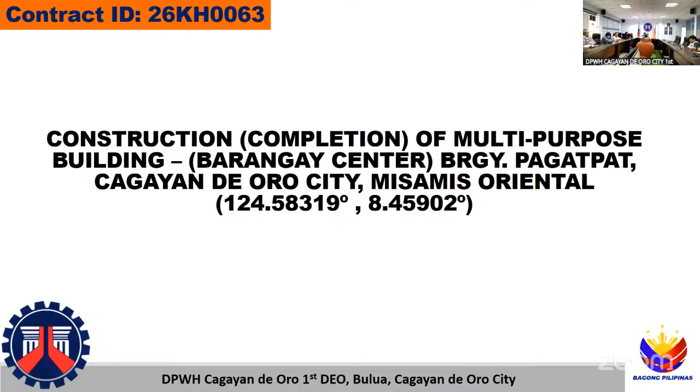Hello, good afternoon, everyone. I'll be representing the project named Construction Completion of Multipurpose Building, Barangay Center, Barangay Pagatpat, Cagayan de Oro City, Misamis Oriental, with coordinates of 124.58319 and 8.45902, with a contract ID of 26KH0063.

The appropriation for this project is 3 million, with an approved budget contract of 2,969,905.11 centavos, with 100 calendar days, under major categories BICWOPLC, buildings construction without piles, low-rise concrete frame, and similarly BICWOPHC, buildings construction without piles, high-rise concrete frame. The scope of work is the construction of the extended two bays of the existing covered court with electrical works, and the elevation of the existing basketball court concrete slab with painting lines.

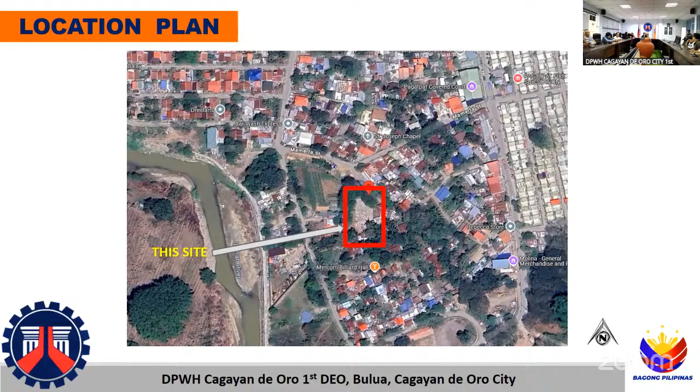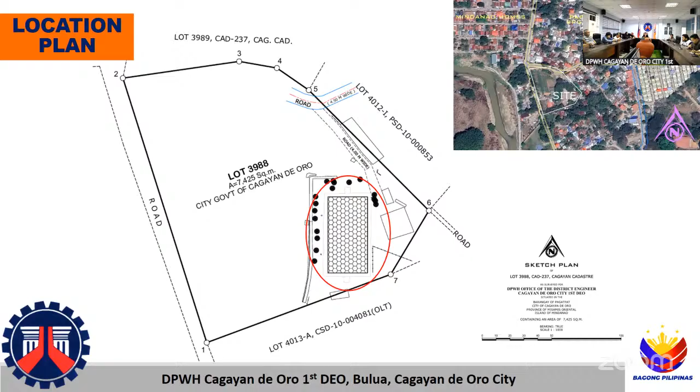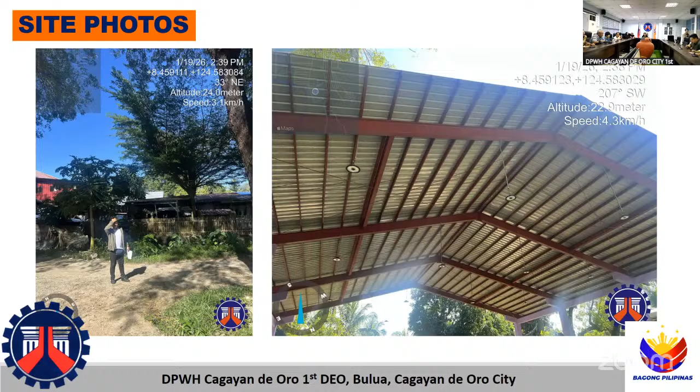This is the location of our project, to be constructed near the St. Joseph Chapel, Mamerta Street. This is the location plan, or site development plan, and these are the site photos of the area. As you can see, we have an existing 3-bay covered court.

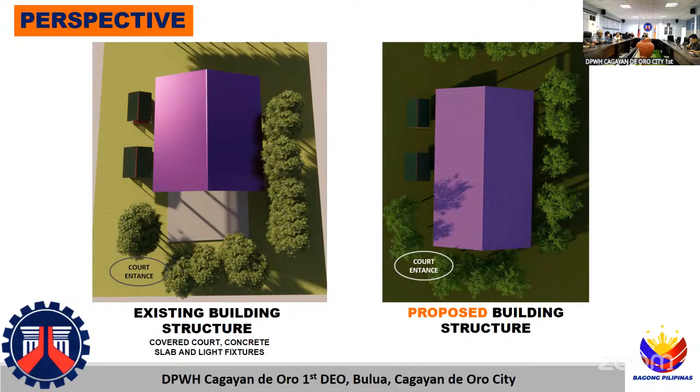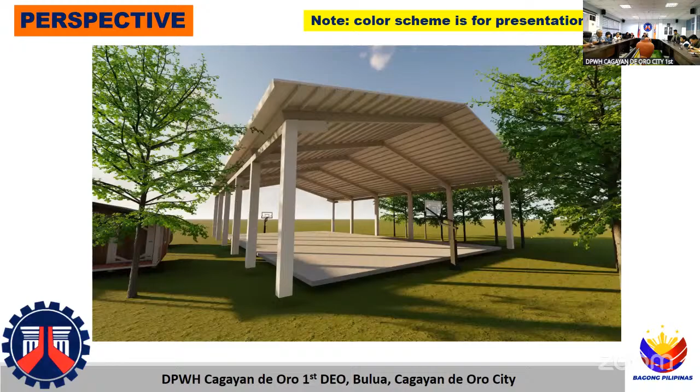For our perspective, the existing building structure, covered court, concrete slab, and lighting fixtures already exist, and for the proposed building structure, it would become a 5-bay covered court rather than just 3, an addition of 2 bays for the covered court. This is the truss perspective.

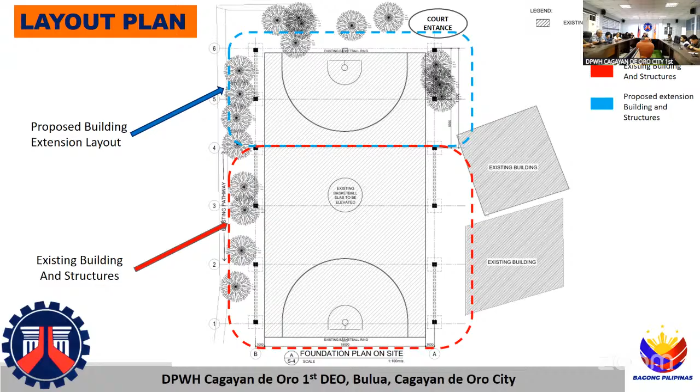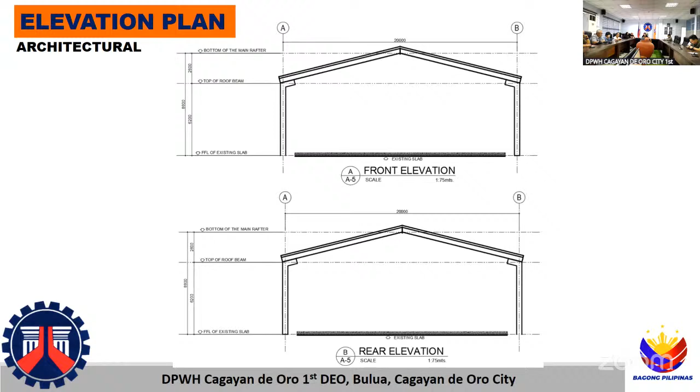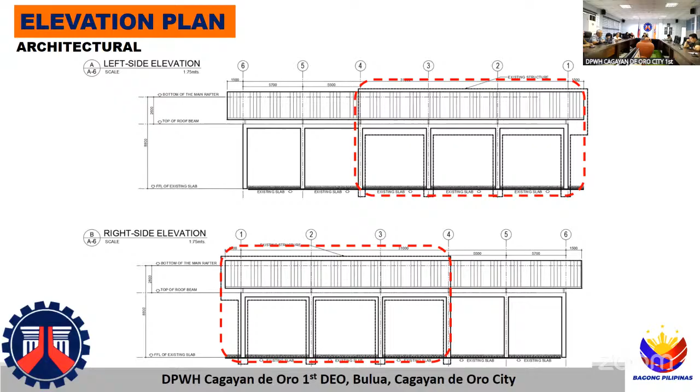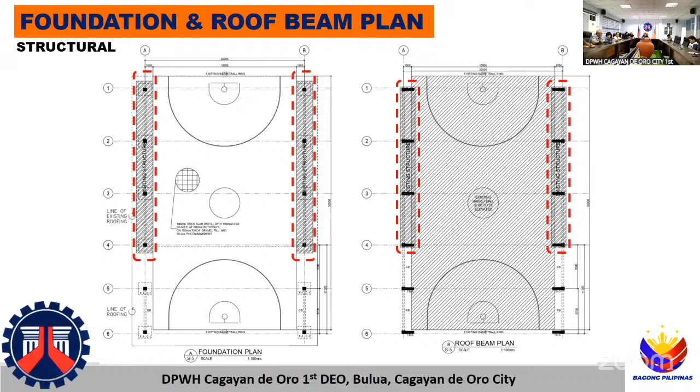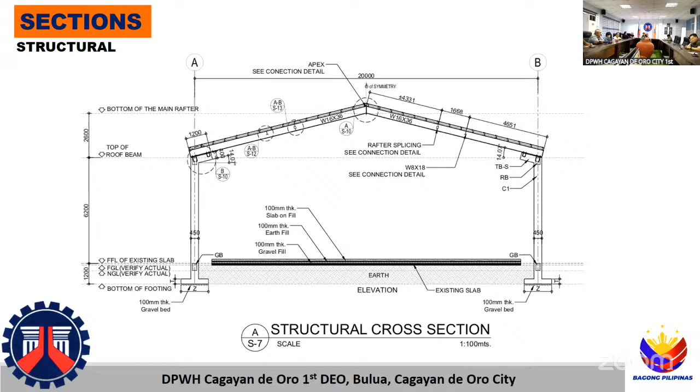For the foundation plan and the roof beam plan, we only have an addition of 4 footings, 4 columns, and 2 grade beams, as well as 4 roof beams to be added for the roof beam plan. We have the roof framing plan, and these are the structural cross sections and longitudinal sections.

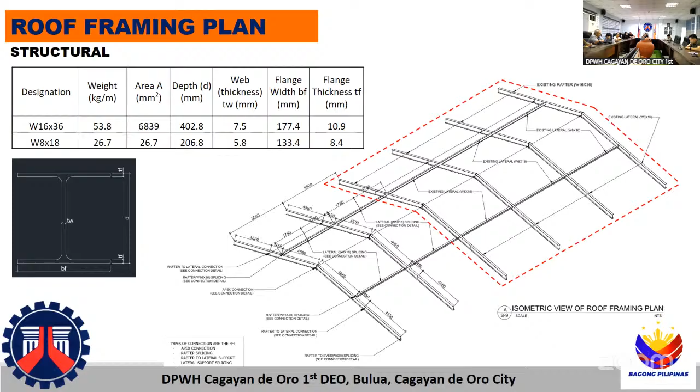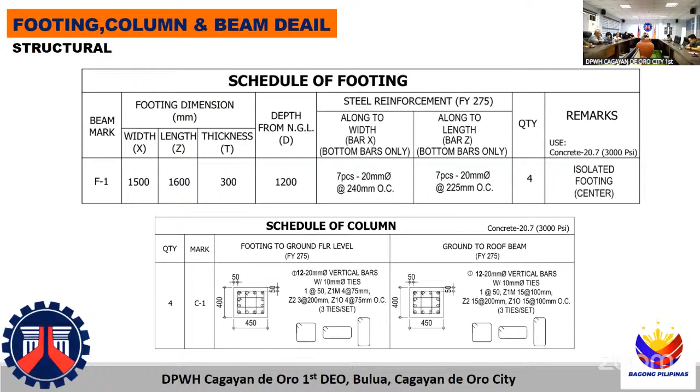For our trusses, we're still going to use the same as the existing trusses, which are wide flange of 16 by 36 and 8 by 18. These are our schedules for our footing and column, and for our beams. These are the details, the connection details.

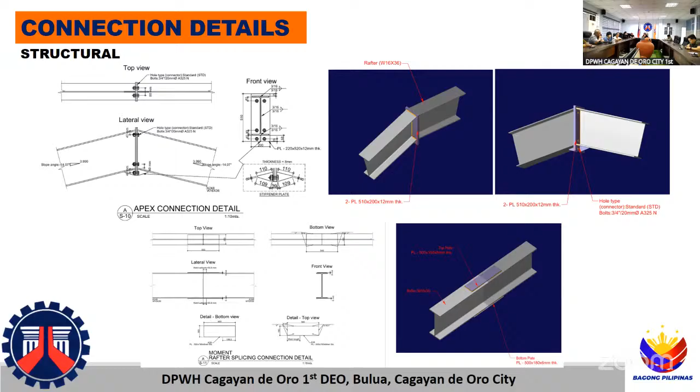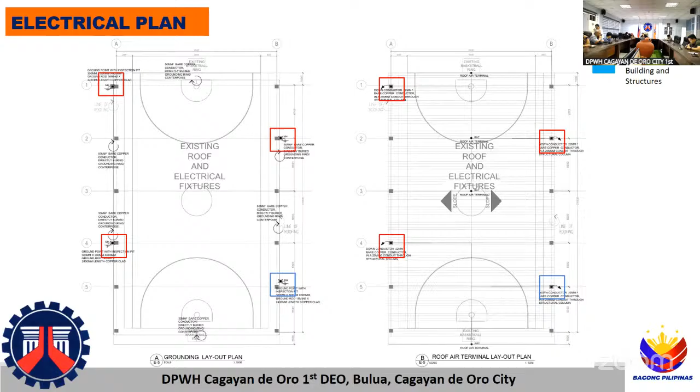As for our electrical plan, we have the lighting layout plan, the power layout plan, and the grounding and roof air terminal layout plan.

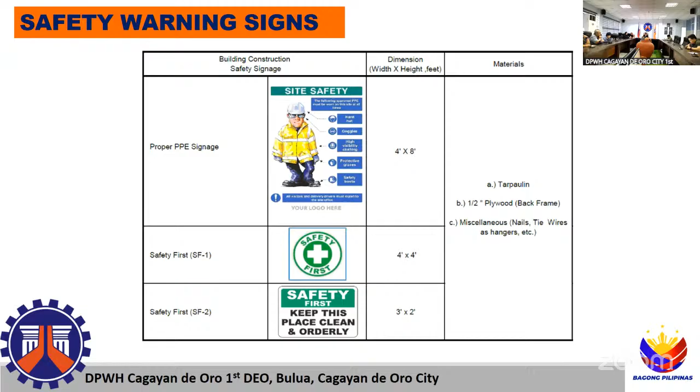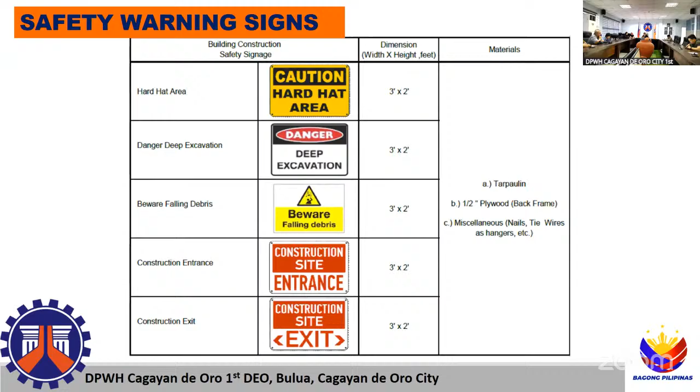And of course, we have our safety warning signs, which are the proper PPE signage, Safety First SF1 and SF2, the hard hat area, danger deep excavation, beware of falling debris, construction entrance, construction exit, safety harness required, welding hot work area, authorized personnel only, fall hazard, and temporary material stocking area.

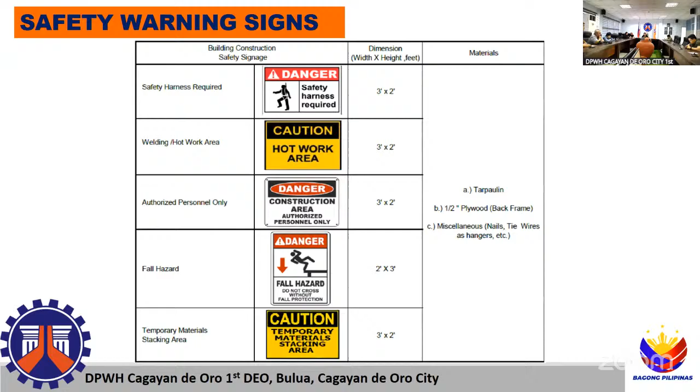For the summary of quantities, Part B, other general requirements: B51 project billboard signboard, 2 each; B71 occupational safety and health, 1 lump sum; B91 mobilization and demobilization, 1 lump sum.

For Part C, earthworks: 803-1A structure excavation common soil, 32.13 cubic meter; 800-4 individual removal of trees, 2 each; 804-1A embankment from roadway structure excavation common soil, 107.19 cubic meter; 804-2A embankment from borrow common soil, 75.06 cubic meter; 804-7 gravel fill, 58.56 cubic meter.

For Part D, reinforced concrete: 900-1C structural concrete, 12.08 cubic meter; 902-1A1 reinforcing steel deformed grade 40, 4,654.05 kilograms; 900-2C structural concrete class B 28 days, 67.60 cubic meter; 903-2 formworks and false works, 122.85 square meter.

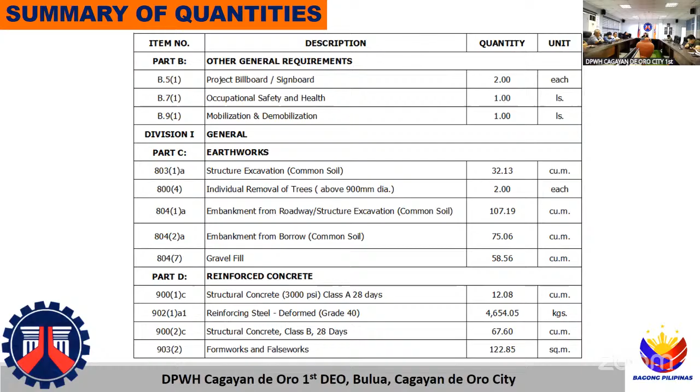For Part E, finishing and other civil works: 1013-2A fabricated metal roofing accessory, 17.08 linear meter; 1014-1B2 pre-painted metal sheets, 296.33 square meter; 1032-1A painting works for masonry concrete, 75.46 square meter; 1032-1C painting works steel, 277.51 square meter.

1047-4B metal structure accessories turnbuckle, 8 each; 1047-5A metal structure accessories bolts and rods, 19.76 kilograms; 1047-5B metal structure accessories sagrods, 42.62 kilograms; 1047-5C metal structure accessories cross bracing, 161.16 kilograms; 1047-5D metal structures accessories steel plates, 820.52 kilograms.

1047-8A structural steel trusses, 3,327.60 kilograms; 1047-8B structural steel purlins, 669.06 kilograms.

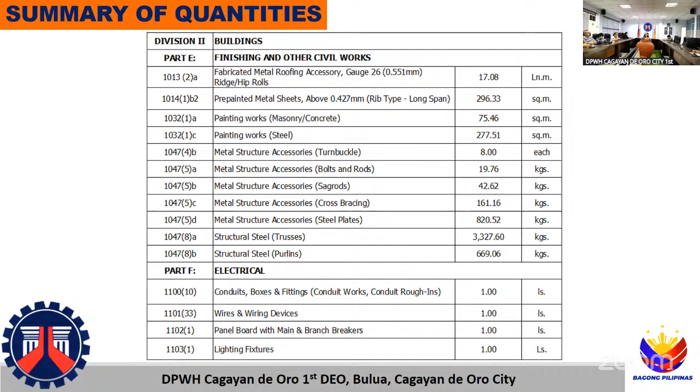And for Part F, electrical: 1100-10 conduits, boxes, and fittings, 1 lump sum; 1101.33 wires and wiring devices, 1 lump sum; 1102.1 panel with main and branch breakers, 1 lump sum; 1103.1 lighting fixtures, 1 lump sum.

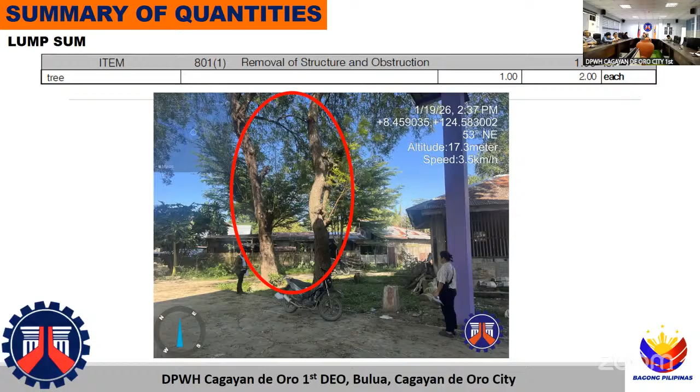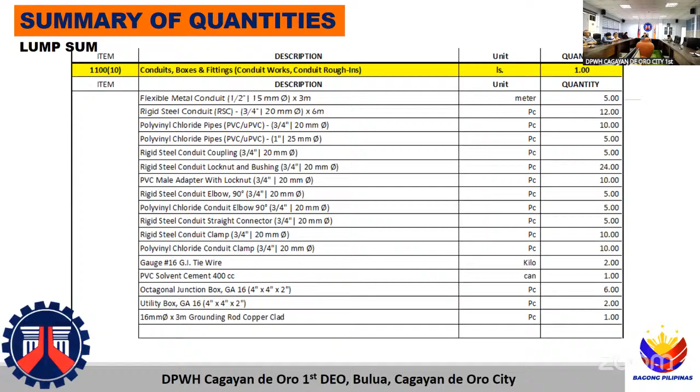So for the lump sum items in our summary of quantities, we have removal of structures and obstruction - the circled red 2 trees are to be removed. And for our conduits and boxes, wires and wiring devices, panel board, and lighting fixtures.

And for our MER, or minimum equipment requirement: stake truck cargo, 1 unit leased; concrete vibrator, 2 units owned; backhoe, 1 unit leased; dump truck, 1 unit leased; 1 bagger mixer, 1 unit owned; bar cutter, 1 unit owned; bar bender, 1 unit owned; welding machine, 1 unit owned; material testing apparatus, 1 set owned; minor tools, 1 set owned; truck mounted crane, 1 unit leased; plate compactor, 1 unit owned; chainsaw, 1 unit owned; grinding machine with accessories, 1 unit owned.

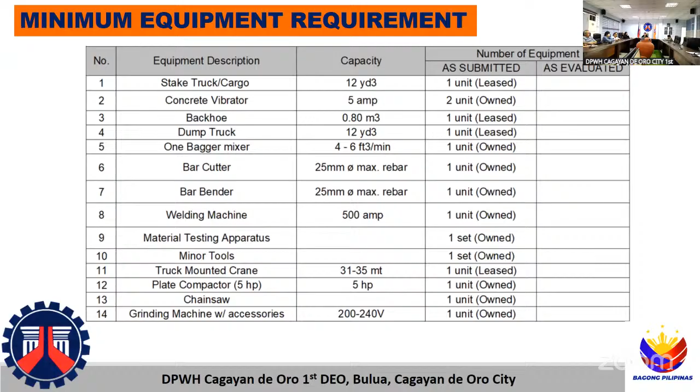That is all. Thank you. So, any questions or clarifications?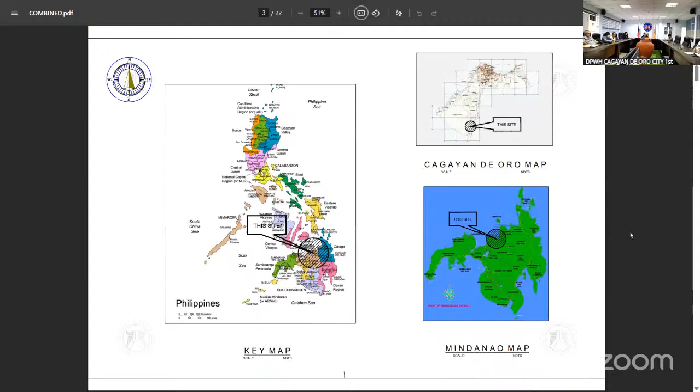So for the general drawing, it is located in Barangay Tignapoloan. This is the location map, and this is the site development plan. For specifics, this is fronting the Manay High School and the Manay Health Center, so we will be having a rehabilitation of the existing paved road.

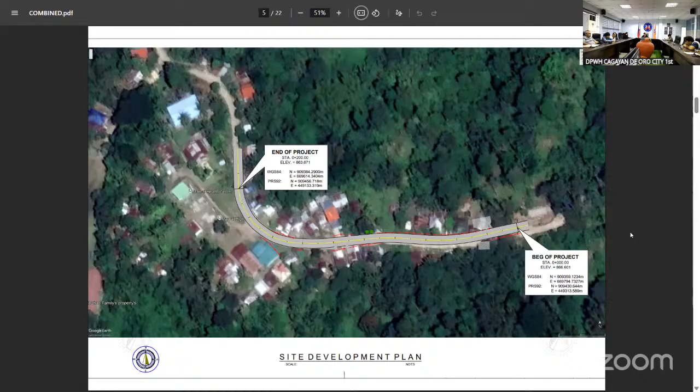So this is the disposal site plan, and these are the site images, the geotag images.

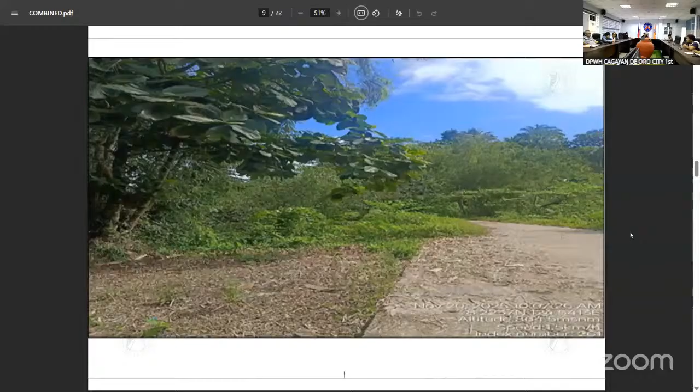So for the plan and profile, this is the 200-meter length for the description of the rehab of road. We can also see the scope of work in the stationing of the solar street lights.

So this is the straight line diagram. And for the typical drawings, we will be having a detail of the reblocking doweled pavement details, and the width of the road is 3.05, so 6.1 meters both sides, and the installation of solar streetlights.

So also this project contains reflectorized thermoplastic pavement markings. So this is the detail. So these are also the details for the PCCP details, geometric design standard drawings.

So for the summary of quantities, we have here B.3, permits and clearances, 1 lump sum; B.5, project billboard and signboard, four each; occupational safety and health program, 1 lump sum; traffic management, 1.67 months; mobilization, demobilization, 1 lump sum; removal of actual structure obstruction, 0.23 meters thick; PCCP unreinforced, 1,220 square meter; surplus common excavation, 372.7 cubic; structure excavation, 4.75 cubic; embankment from roadway structure excavation common soil, 7.26 cubic; gravel fill, 0.43 cubic; aggregate base course, 244 cubic meters.

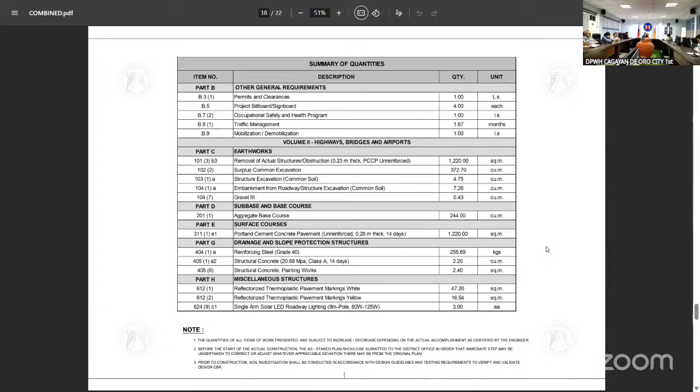So for our minimum equipment requirement, this is subject to changes which will be posted for the subject bid bulletin. So just be updated.

So for the minimum equipment requirement, we have here backhoe, 1 leased; dump truck, 2 leased; bulldozer, 1 leased; payloader, 1 leased; motorized road grader, 1 leased; vibratory roller, 1 leased; water truck pump, 1 leased; plate compactor, 1 owned; transit mixer, 4 leased; concrete vibrator, 2 owned; concrete batch plant, 1 leased; concrete screeder, 1 owned; concrete saw, 1 owned.

Bar cutter, 1 owned; joint sealer machine, 1 leased; bar bender, 1 owned; 1 bagger mixer, 1 owned; truck mounted crane, 21 to 25 metric ton, 1 leased; cargo service truck, 2 to 5 metric ton, 1 leased; and for the 9 to 10 metric ton cargo service truck, 1 leased.

Backhoe with breaker, 1 leased; applicator machine, 1 leased; kneading machine, 1 leased; material testing apparatus, 1 owned; two-way radio, 2 units; and barricade flasher light, 29 leased. So again, this will be subject to changes which will be posted for the bid bulletin.

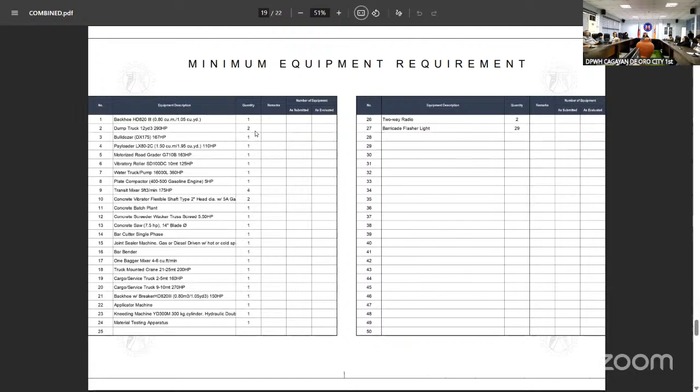So for the inclusion of pay items, for B.3 permits and clearances, we have here the NCIP permits and clearances as per memo order number R10 FBV 00395 series of 2025. And these are the specifications of the single arm solar LED roadway lighting.

So these are also the attachments of the project. This is the soil test reports. So that's all for this project. Thank you, and any question?

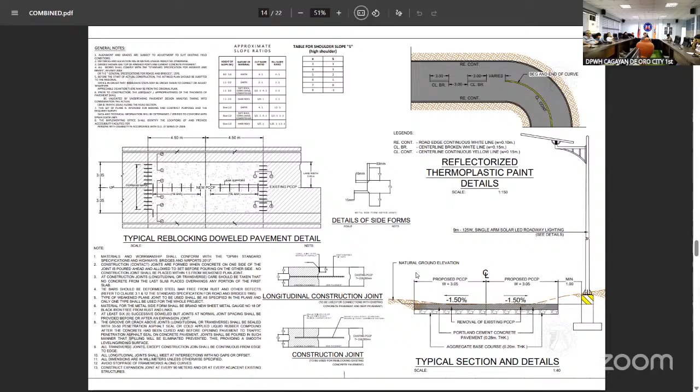Again, by Engineer Galiso, with contract ID number 26KH0092, rehabilitation of road at Barangay San Simon, station 0 plus 0 to 0 plus 200 of this city, with an approved budget for the contract of 4,605,966 pesos and 75 centavos.

And also there's an installation of solar LED roadway lightings. So for the general drawing, this is located in Barangay San Simon. This is the location map. This is after going left sa Barangay Hall.

So this is the site development plan. You can see here on the right side, this is going to the Barangay Hall. So this is going straight. So this is the 200-meter length of the project.

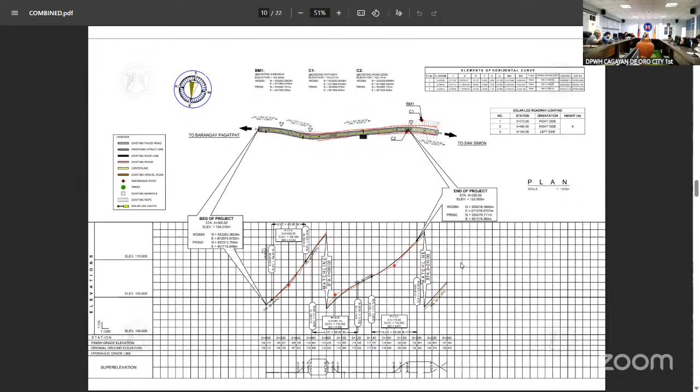So straight line diagram. For typical drawing, this is our typical drawing. We will be having rehabilitation of road with the existing road width of 2.5 meters both sides, so equivalent of 5 meters all. Also on the 200-meter length, we will be having reflectorized thermoplastic pavement markings.

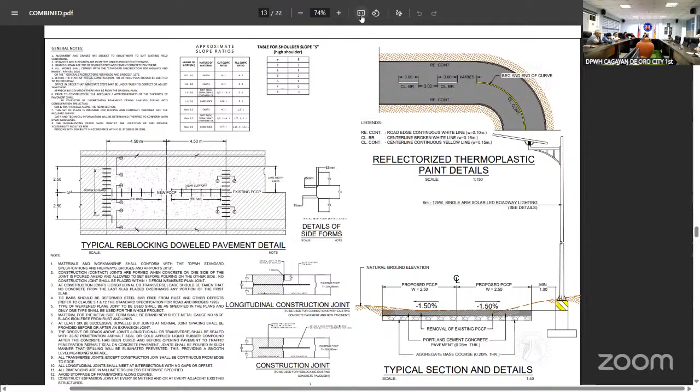So this is the details. Also there's installation of solar LED roadway lightings. So this is the geometric PCCP details. Geometric design standard drawings.

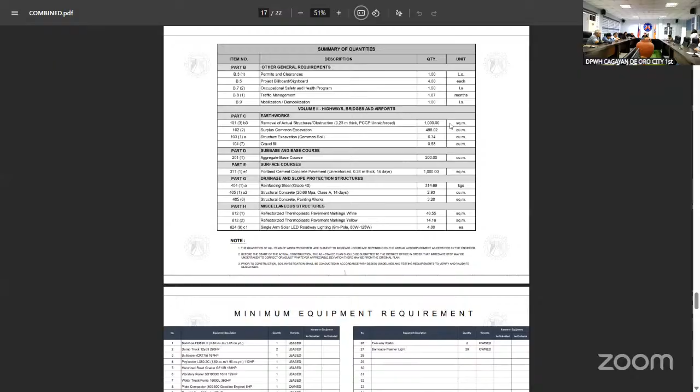So for the summary of quantities, we have here permits and clearances, 1 lump sum, project billboard, signboard 4 each, occupational safety and health program, 1 lump sum, traffic management, 1.67 months, mobilization and demobilization, 1 lump sum, removal of actual structure and obstruction, 0.23 meter thick, 1,000 square meter.

Surplus common excavation, 488.02 cubic meter, structure excavation common soil, 6.34 cubic meter, gravel fill, 0.58 cubic meter, aggregate base course, 200 cubic meter, Portland cement concrete pavement unreinforced, 0.28 meters thick, 14 days, 1,000 square meter, reinforcing steel grade 40, 314.69 kilograms, structural concrete class A, 14 days, 2.93 cubic meters, structural concrete pointing works, 3.2 square meter.

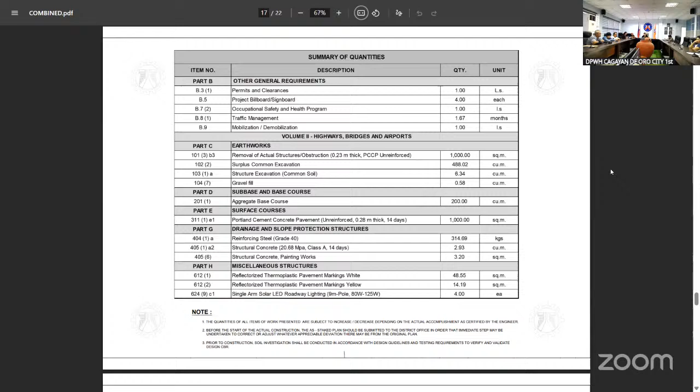Reflectorized thermoplastic pavement markings, white, 48.55 square meter, and for the yellow, 14.19 square meter. Single arm solar LED roadway lighting, 9-meter pole, 80 to 125 watts, for each.

So for the minimum equipment requirement, we have here backhoe 1 leased, dump truck 2 leased, bulldozer 1 leased, payloader 1 leased, motorized road grader 1 leased, vibratory roller 1 leased, water truck pump 1 leased, plate compactor 1 owned, transit mixer 4 leased, concrete vibrator 2 owned, concrete batch plant 1 leased, concrete screeder 1 owned.

Concrete saw 1 owned, bar cutter 1 owned, joint sealer machine 1 leased, bar bender 1 owned, bagger mixer 1 owned, truck mounted crane 1 leased, cargo service truck 2 to 5 metric ton, 1 leased.

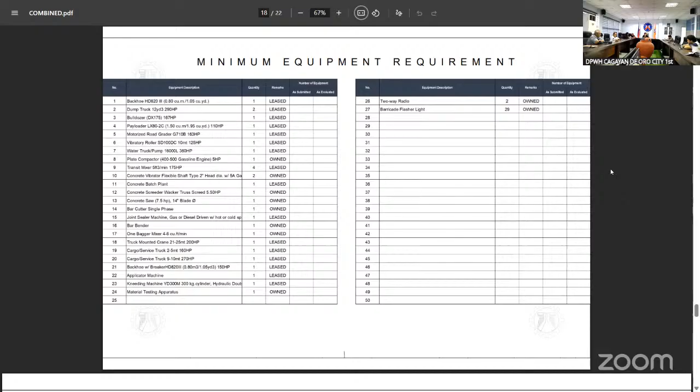Cargo service truck 9 to 10 metric ton, 1 leased. Backhoe with breaker, 1 leased. Applicator machine, 1 leased. Kneading machine, 1 leased. Material testing apparatus, 1 owned. Two-way radio, 2 owned. And barricade flasher light, 29 owned.

So for the inclusion of pay items, we have here the B.3 permits and clearances. The inclusion of this item is the excavation permit as per City Ordinance number 12860 of 2024, page 84 of 134. This cost includes inspection and supervision.

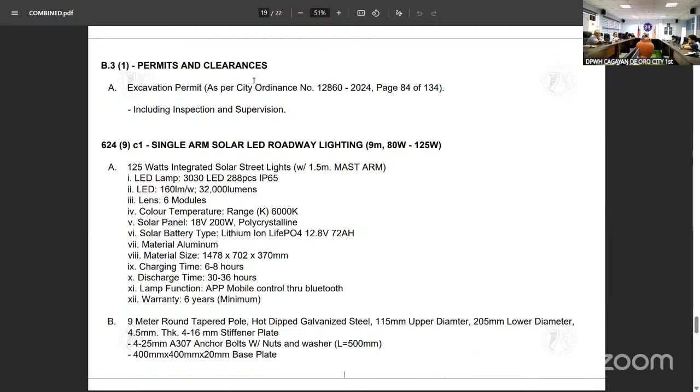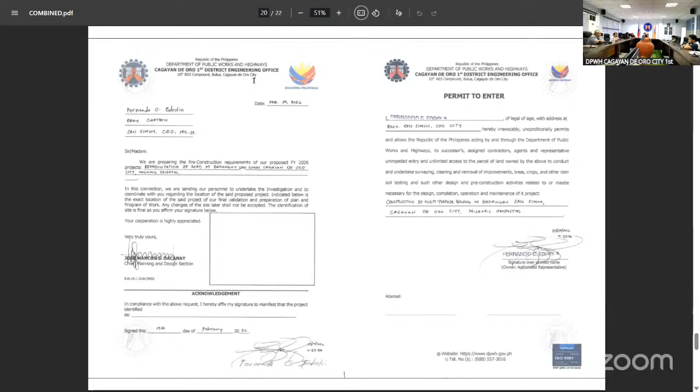So also these are the details of the single arm solar LED roadway lighting, 9-meter pole. So these are also the attachments, this is the road right of way attachments. We have here the permit to enter, site validation, and also the soil test reports.

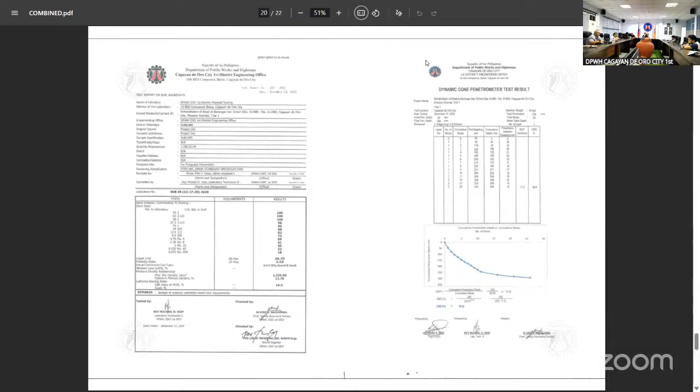So that's all for this project. Thank you, and any questions?

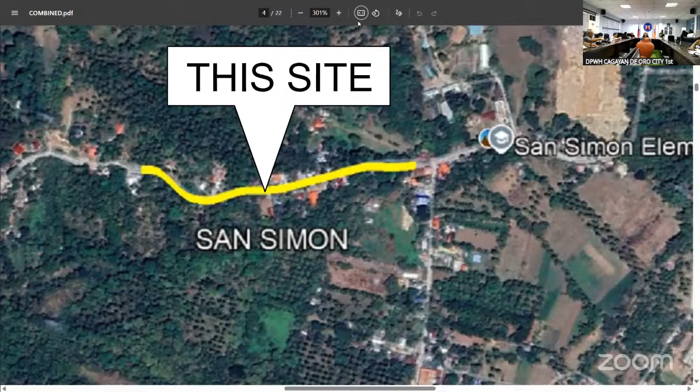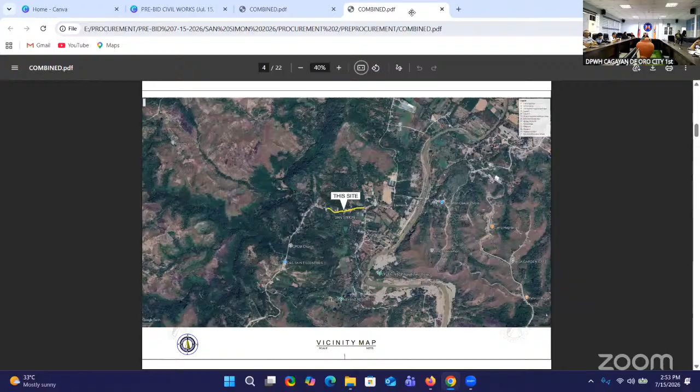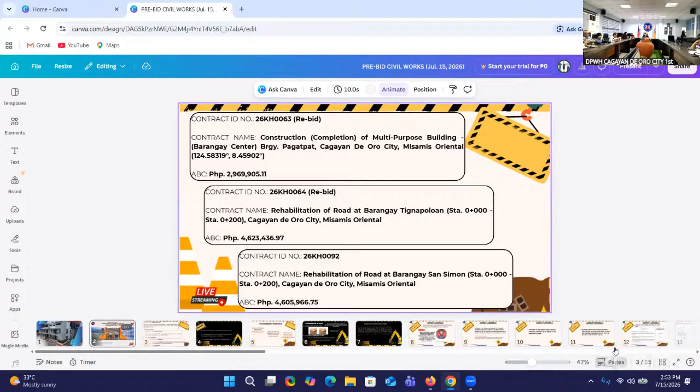Thank you to all the programmers who presented their scope reports, technical specifications, and other relevant information of the three projects. So may I now request the Bids Secretariat to discuss the important matters or provisions for the bidding documents, including the eligibility requirements, technical requirements, financial requirements, bid security requirements, schedule of submission and opening of bids, bid evaluation process, and other important reminders.

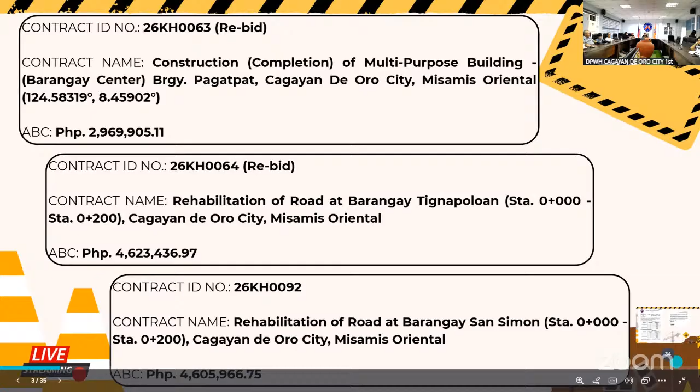So here we have the three infrastructure projects with their corresponding contract IDs and the approved budget for the contract. For the agenda, we will discuss the project details and basic contract data as discussed earlier, and next we have the brief orientation on the minimum requirements that must be complied with by the bidders, and lastly the common reasons for non-compliant bids.

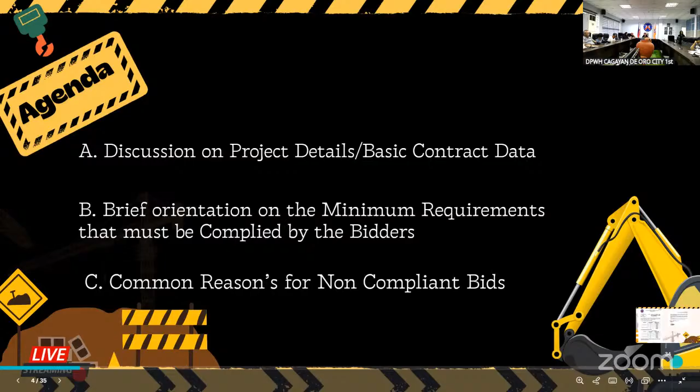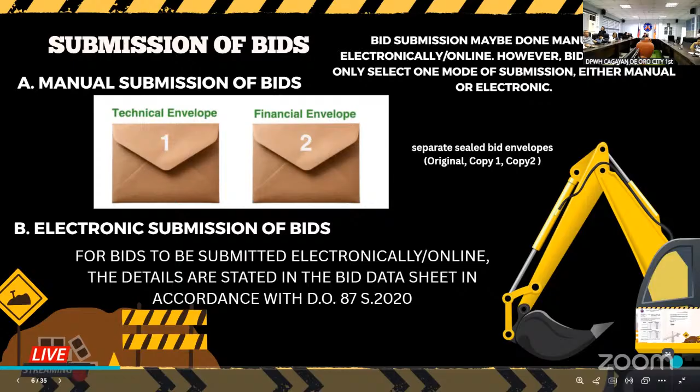The bid submission may be done manually or electronically. However, bidders should only select one mode of submission, either manual or electronic. For manual submission, we have the two envelope system, wherein the first envelope is the technical envelope, which contains the technical documents of the bidder, with original copy, copy 1, and copy 2. The second envelope is the financial envelope, which contains the financial proposal of the bidder with original, copy 1, and copy 2. For electronic submission, the details are stated in the bid data sheet in accordance with Department Order 87, series of 2020.

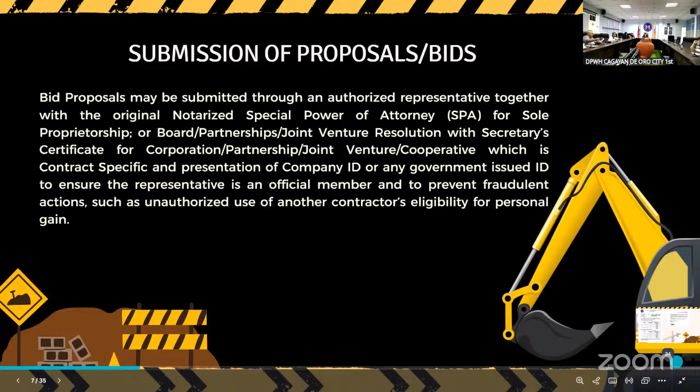Bid proposals may be submitted through an authorized representative together with the original notarized special power of attorney or SPA for sole proprietorship, or board or partnership joint venture resolution with secretary's certificate for corporations, partnership, joint venture, or cooperative, which is contract specific, and presentation of a company ID or any government issued ID, to ensure the representative is an official member and to prevent fraudulent actions such as unauthorized use of another contractor's eligibility for personal gain.

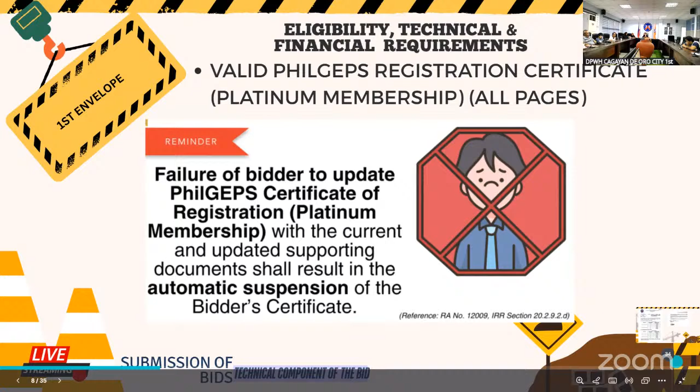Next, for the first envelope, the bidder must provide a valid PhilGEPS registration certificate in platinum membership in all pages, and failure of the bidder to update the PhilGEPS certificate of registration shall result in an automatic suspension of the bidder's certificate.

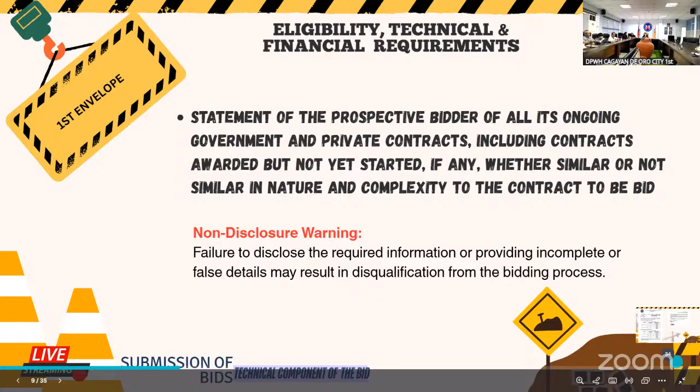Next, the bidder must provide the statement of all ongoing government and private contracts, including contracts awarded but not yet started. Take note that failure to disclose the required information or providing incomplete, false details may result in disqualification from the bidding process.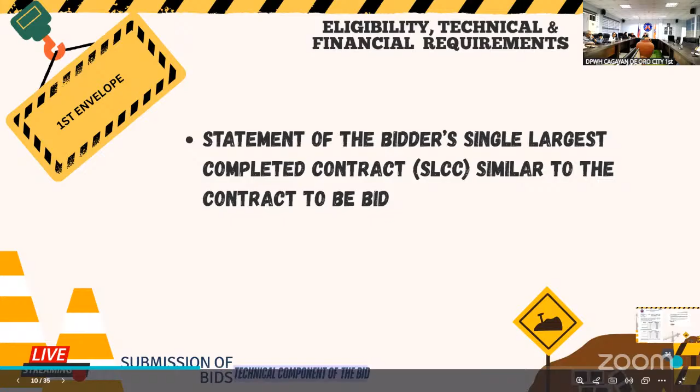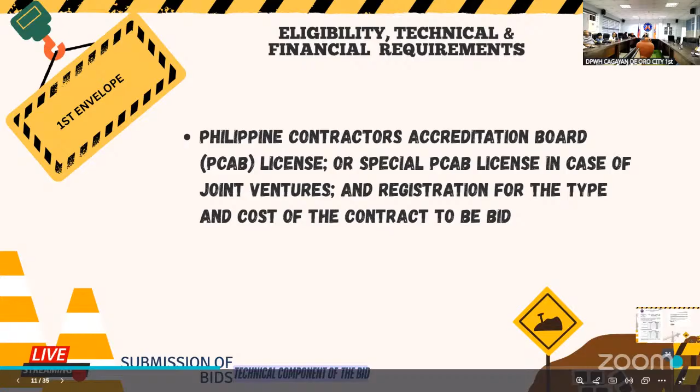Next, the bidder must provide the single largest completed contract or the SLCC, the PCAB license, or the special PCAB license in case of joint venture.

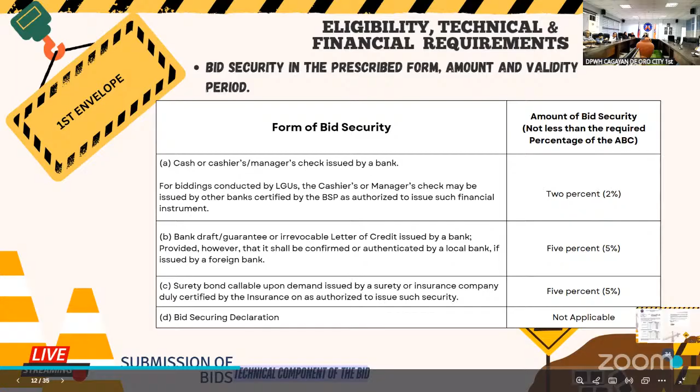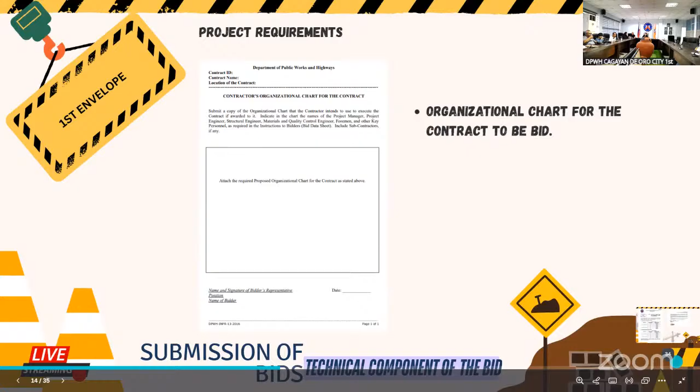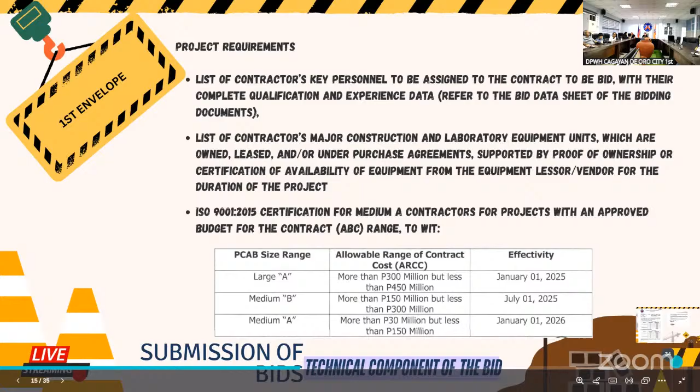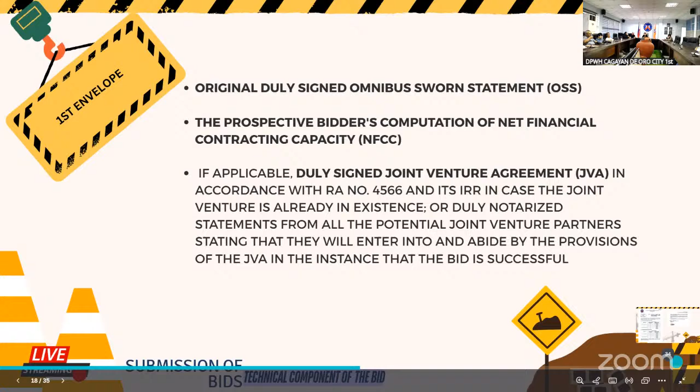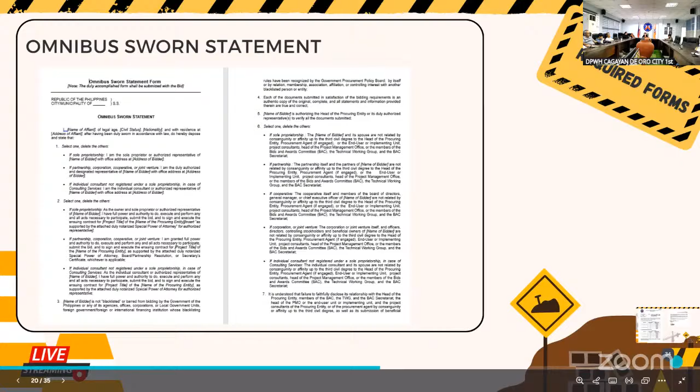Here we have the omnibus sworn statement in its standard form. Also, the bidder must provide the latest general information sheet or GIS, reflecting the beneficial ownership information newly received by the Securities and Exchange Commission for corporations.

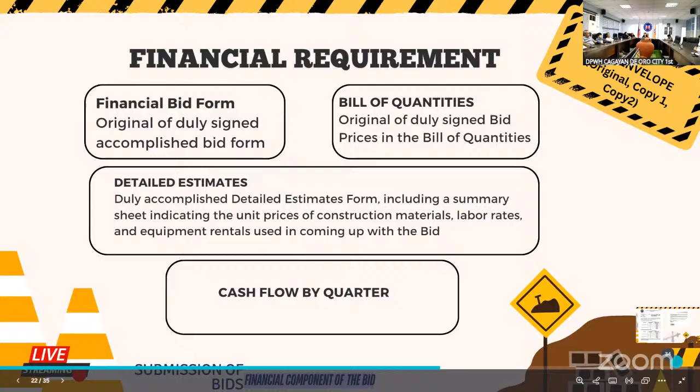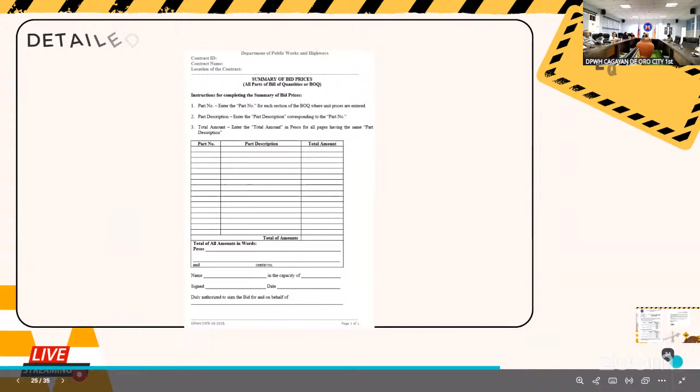Next, for the second envelope, we have the financial requirement. The bidder must provide an original and duly signed accomplished financial bid form, bill of quantities, detailed estimates, and cash flow by quarter. Here we have the following documents in their standard form: the bid form, the bill of quantities, the detailed estimates, and the cash flow by quarter.

Next, we have the common grounds for non-compliant bids, based on observations from previous procurement activities: missing or incomplete required documents, unsigned or improperly signed forms, incorrect or inconsistent computations in the bill of quantities or financial proposal, expired or invalid licenses and permits, non-compliance with specified technical requirements, and failure to use prescribed forms.

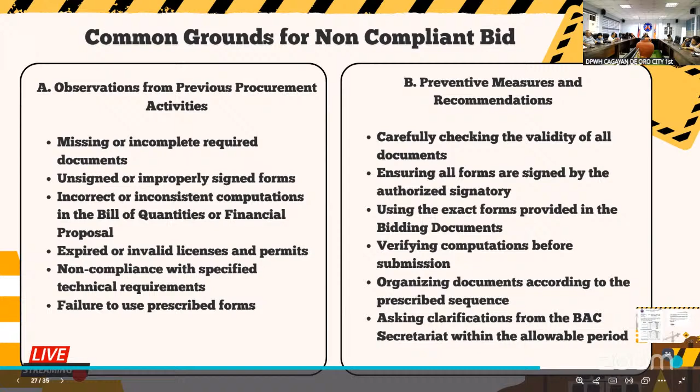So next, we have the preventive measures and recommendations: carefully checking the validity of all documents, ensuring all forms are signed by the authorized signatory, using the exact forms provided in the bidding documents, verifying computations before submission, organizing documents according to the prescribed sequence, and asking clarifications from the BAC secretariat within the allowable period.